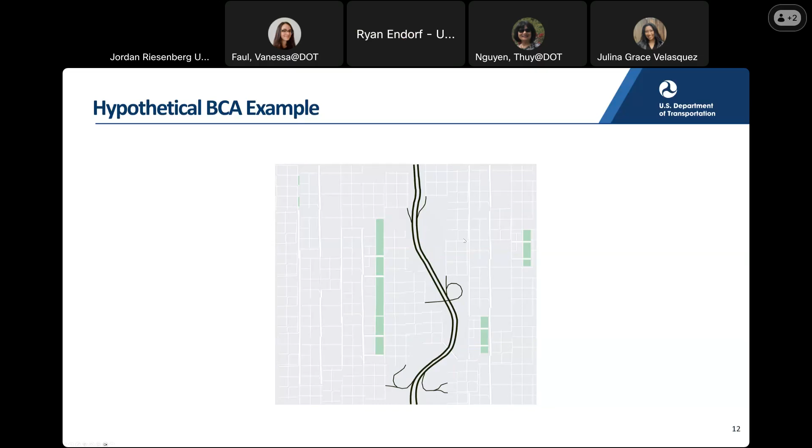So we like to go over just a simple BCA example. If you've never seen a BCA before, we like to walk folks through one from start to finish just to understand the process. So in this hypothetical example, we have a highway corridor that's been built between two neighborhoods. You can see the grid on each side, and our proposed project here will be to add a new bike and pedestrian bridge over the freeway to reconnect the local neighborhoods on each side. And we'll say that our hypothetical project here cost $10 million.

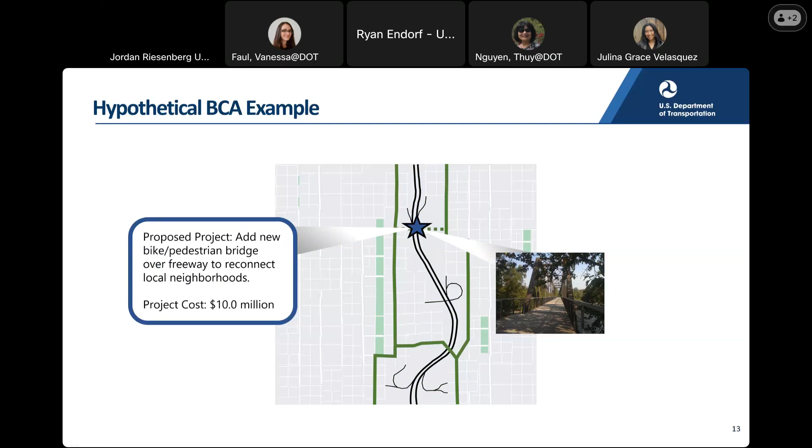So first, we have to define our no-build scenario. Just to illustrate here on the left, we have an existing bike facility on one side of the freeway, an existing bike facility on the other. We have our project location where this green dashed line is. But under the no-build, without this project, the current cyclists and pedestrians would have to continue to use a different route crossing under the freeway. And we'll say that maybe we have some survey data, travel survey data, or trail counters in this case that suggest that about 1,000 cyclists are doing this route daily.

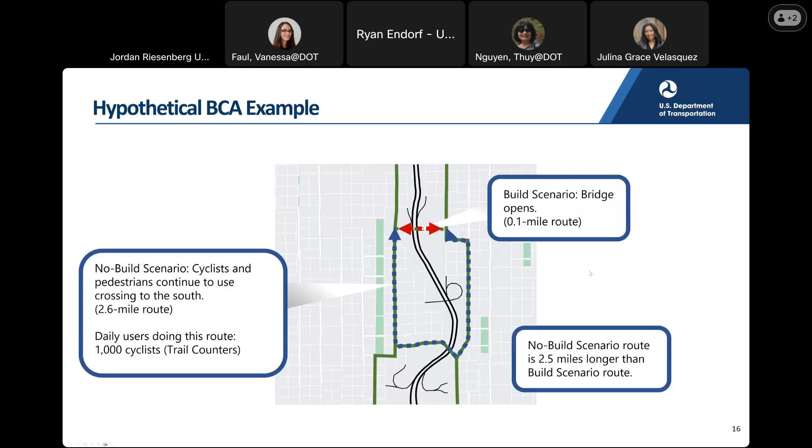Under the build scenario, we'll build this bridge that's only going to be 0.1 miles long. And this will allow our cyclists to have a shorter route, at least for those who would be traveling across the freeway and would otherwise have to travel back north. So our no-build scenario route in this example is 2.5 miles longer than the build scenario route, right? Because under our no-build, our cyclists would have to travel 2.6 miles to detour around this area. And once we open up this new bridge, they'll only have to go 0.1 miles. So they'll save 2.5 miles in travel distance.

So our approach, we want to compare the state of the world with and without the proposed project improvement. Under the no-build scenario, as we said, cyclists would continue to use the 2.6 mile route. Under the build scenario, the bridge opens, it provides this shortcut route that's only 0.1 miles. So we would expect that in this example, the major benefit category would be the travel time savings for mitigating 2.5 miles of additional travel. And these benefits would begin when the project opens. So to show you an example of how you would calculate the travel time savings, just for simplicity to keep this example short, we're going to assume that there's not pedestrians, right?

And if you were doing this project, you would have some assumptions about pedestrians. We're just pretending for a minute that we're just talking about the cyclists. We'll assume an average cycling speed of 9.8 miles an hour, and we'll assume that there's no cycling growth over time to keep the math simple. Again, in the real world, if you were doing this example, you might assume that every year, if the area is growing, maybe there would be more cyclists over time.

So to calculate the annual travel time savings in a given year, this is before we discount them, it would be the marginal detour time times the daily number of users. So how much extra are people having to travel in time? How many people does it affect? We'll need some hourly value of time. So we'll need a way to convert the time to dollars so that it's comparable to costs and other benefits in the BCA. And because we need annual, we need to decide some sort of annualization factor for this, since we're using the daily users.

So secondly, the project information tab. Once you identify the information that you need, you come to this first page and you enter your information. You define your type of project, your location, your length of the project as well, and then you start to put in your highway information, your traffic information, your safety information. That information starts to automatically populate, creating a result that we will see in the other page. Next slide.

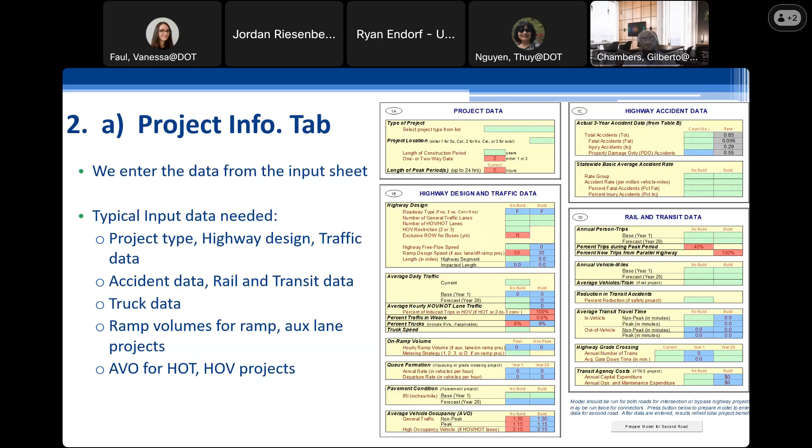Once you have this information identified, you also have to include here your project costs as well, right? You enter the information whether it be for design, right of way, or construction. Generally, those happen before the project starts, and you will always do that.

Later on, you will enter your maintenance costs as well, and maybe you have some mitigation costs that need to be incorporated. So that information is entered in this spreadsheet, and of course, they're all discounted. At the end, we're going to have discounted costs and discounted benefits. That will be the source of our next slides as well.

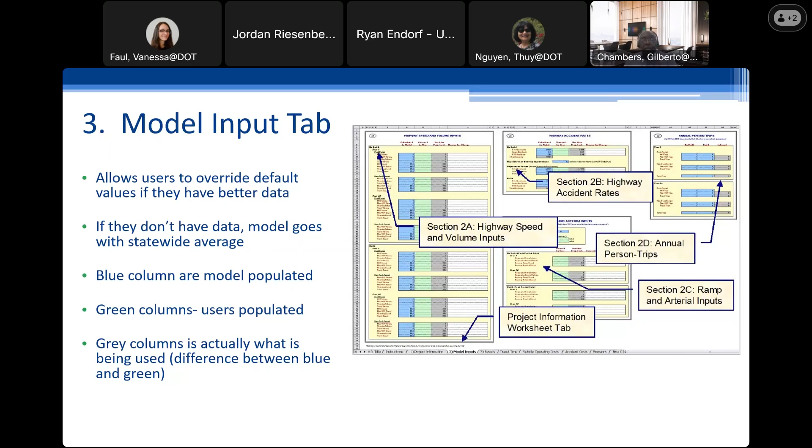So generally CalBC will populate the information for you in the blue boxes. If you have better information, then you can overwrite the information that we present. Our information is based on averages for our state, but if you have information that says otherwise, maybe you have recent research or there's a study that's showing what's going on in your area, you can overwrite that data in the green boxes. Then the final values that will be taken into account for the analysis will be those in the gray boxes. Next slide.

At the end, you will have a final calculation tab, which is going to be a summary of all the different benefits and costs discounted, and that will give you the information you need to proceed to the final calculation. Next.

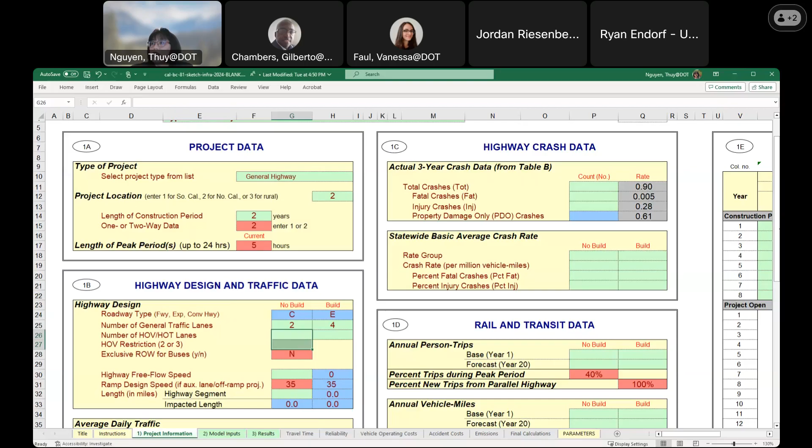So next box is the highway design. So I'm going from a conventional highway with 2 lanes each direction going to an expressway. So I'm going to put in my design, C for conventional, E for expressway. Currently in my no build, I have 2 lanes. And in the build scenario, I will have 4 lanes. And then my project doesn't involve any HOT or HOV, so I will skip that section. Highway free flow speed right now is 55. And by the time I do my improvement, I hope to gain some speed based on the study model. So I'm going to assume 65 miles per hour for that.

The highway segment, this is where you put the length of your project. So my project is 6.1 miles, and it automatically calculates the impacted length at 6.1. If for some project your highway segment is different than your impacted segment, for instance, like the ramps, you're more than welcome to put in the correct length of your impacted segment. You can override this impacted length. Okay. The average daily traffic, this is the traffic data. So some of our CalBC required data, and I recommend users gather all these data ahead of time before you come and use the model.

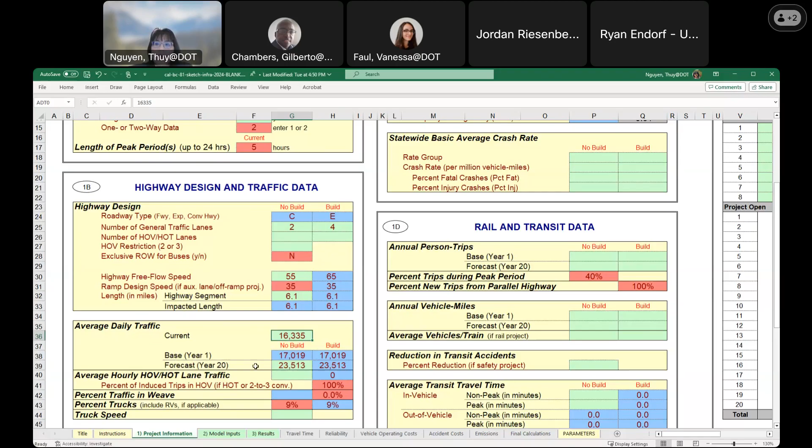So the traffic data, you can typically get it from your traffic ops or the travel demand group, and they can give you your current AADT. So you need the current ADT, and you need the forecasted 20 years AADT. And the base year, the middle line, the model will default and populate that for you. So you only need the current, which is 16,335. And we have that on Caltrans under the census website, and you can download the booklet and pick up the ADT from there. Okay, so you put that in. Again, no HOT or HOV involved, so I will ignore that.

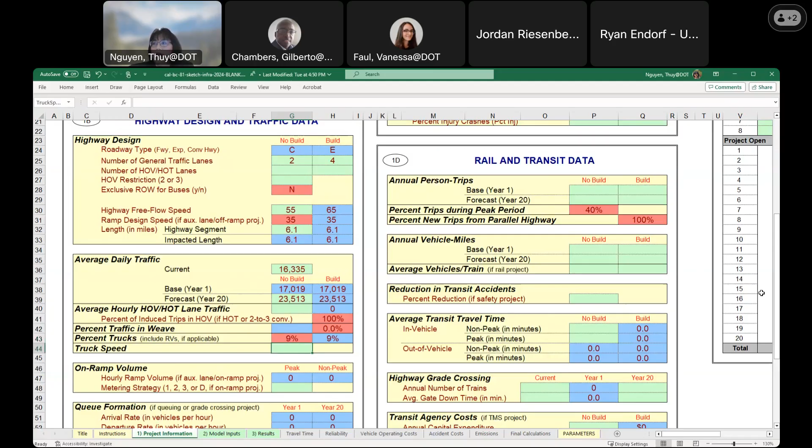No weaving is involved. The model defaults to 9% trucks. In some areas like Northern California District 1, we're hearing that trucks are increasing. It could be 10%, 13%. So if you have different data for trucks, you are more than welcome to override that, but it does default to 9%. The speed, if you have a different speed than 55 miles per hour, you can override that too. So that is for the traffic data box. Down here, I want to call your attention to the information that makes our model a little bit different than the US DOT model.

So this is the INFRA, and every year, as soon as US DOT comes out with the benefit cost guidance for that year, we go in and we take our state Cal-B/C templates and we change them into INFRA, and we take into consideration the AVO, the average vehicle occupancy.

And so the US DOT is somewhat higher than ours. The recommended value is 1.58 for non-peak and 1.48 for peak for US DOT. Ours is 1.32 and 1.15. So California has slightly lower AVO in general.

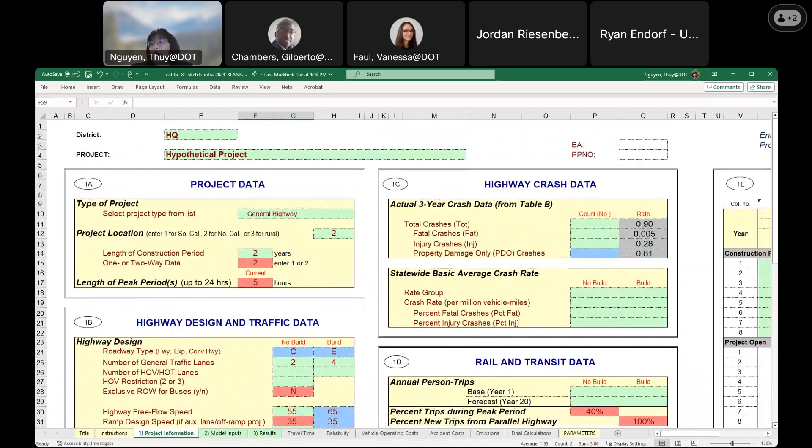Next, highway crash data. So in order to do the analysis for Cal-B/C, you need some accident data, and the actual 3-year data for California, you can obtain it from Caltrans Traffic Ops. So you can input the information there. If you don't have it, you can use the statewide basic.

And we do have a collision on the highway data booklet on the Caltrans website, and you can download that as well. And you can look at your highway rates and the percentage of fatality, and it will also feed into the model, and it would calculate your savings or this benefit for you.

So for the total crashes for this one that I have, based on my data collection, I know that I have 63 total accidents. Fatal crashes, I know I had 6 in the past 3 years, and injury, I have 25. So it automatically puts the remaining from the 63 into the property damage, the PDO blue box for me, so I don't have to do the math on that.

My project doesn't involve any rail or transit data, so I can typically skip the whole box 1D and go over to the cost section. Here is where you put the cost. So your total costs have to do with project support costs, right of way, and construction. And there are specific fields that you can put that in.

Okay, and typically once the facility is constructed, you have to maintain that segment of the highway. So either you have operating and maintenance costs, or you have rehab costs for bridges. So I know that I just have maintenance costs for my segment. I don't have any rehab costs. So it will be 115 for the next 20 years, and you can copy it down. Okay, so that's it. I'm going to zoom out a little bit so you can see everything is pretty much populated on the first tab.

The model input, Gilberto touched on this. So basically, this field here is a user option. For beginning users, we don't recommend you overwrite any data. If you're an advanced user, or you have a better micro simulation, travel demand model, and better counts of your freeway layout and accident data, you're more than welcome to put whatever you want on here, and it will override the model.

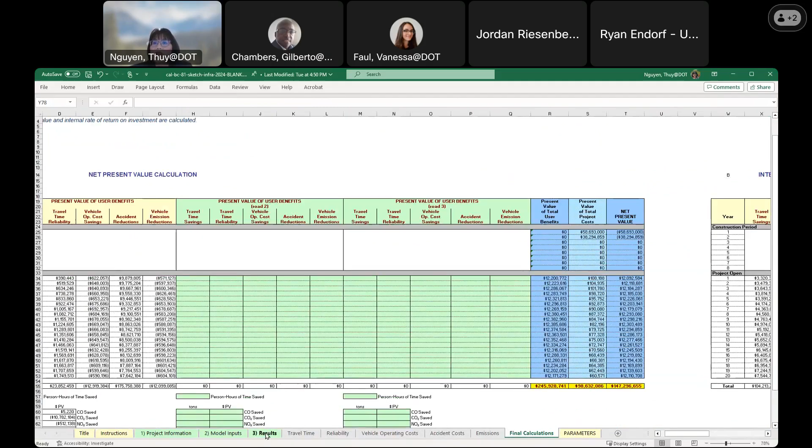Okay, and the way the CalBC works, I want to talk a little more about it, is that once you put in the information on your project information tab, each of the travel time has its own calculation. So you can hover over the formula, and you can see it's very transparent. You can trace out the dependent values and all that. And each of the tabs, reliability, vehicle, did their own calculation, and they put it into the final calculation tab. And from the final calculation, it would feed into the result tab. So that's how everything works.

And then at the end, we have the parameters. And this is where our parameters for INFRA are different than our normal state CalBC template, because we follow the USDOT benefit cost guidance of the year. I think, as Ryan showed, it's December 2023, but sometimes it came out in 2024, January at the earliest, beginning of the year. So we went in and we read the whole booklet, and whatever values we could, we would put in, and then we would change the economic deflator.

The real discount rate is 3.1%. On our state CalBC it is 4.0%. A couple of years ago, USDOT, I think they had 7%.

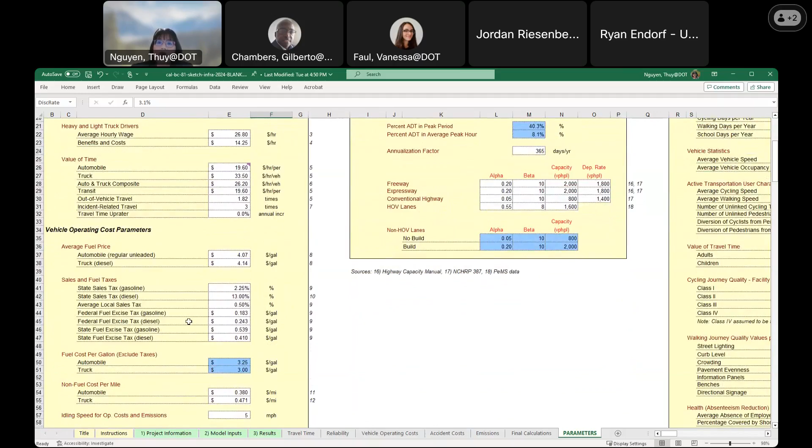So we have to change that to 3.1% on the infra template. Everything else also came from the USDOT guidance. If there's any difference between ours, we would bring up the value to make it more updated. Accident costs, fatality, fuel, gas.

I think the only thing that's a little bit different than ours is the active transportation, because we have our own way of calculating active transportation and the benefit, the mortality, and the rates of cyclists' savings due to health and journey and all that. So our active is a little bit different, but the rest of the module should be pretty much similar to USDOT benefit cost guidance. And if you scroll over to the right, it has all these values.

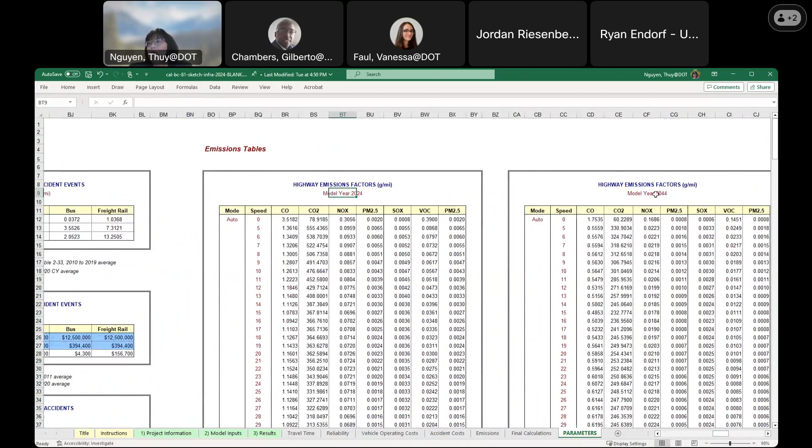And the EMFAC table we have, as soon as California Air Resources Board has some new model built in with the zero emission vehicle, we apply that to our year. So now it's 2024 model year, and the future is 2044. And as you can see, in the old model, they didn't have a whole lot of saving. They were at this benefit because there were a lot of combustion engine cars still on the road.

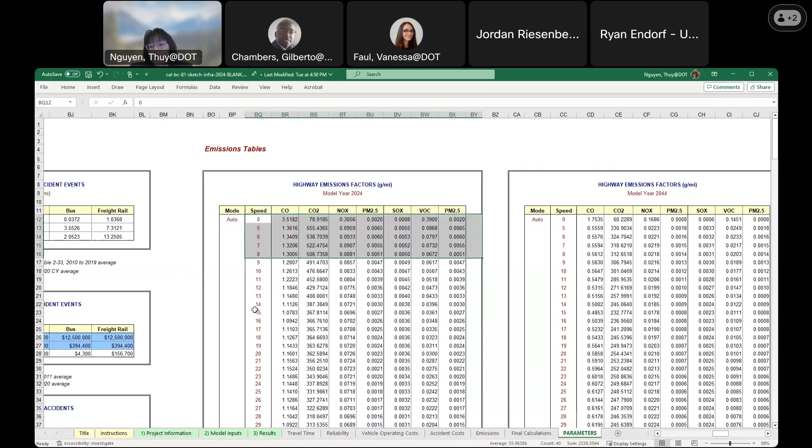So if the car is standing still idling or at below 10, 15 miles, the emission would be bad. And then as the car speeds up between 65 miles and above, they would lose some emission. So with the new model now, a lot of zero emission, the ZEV cars are coming into play.

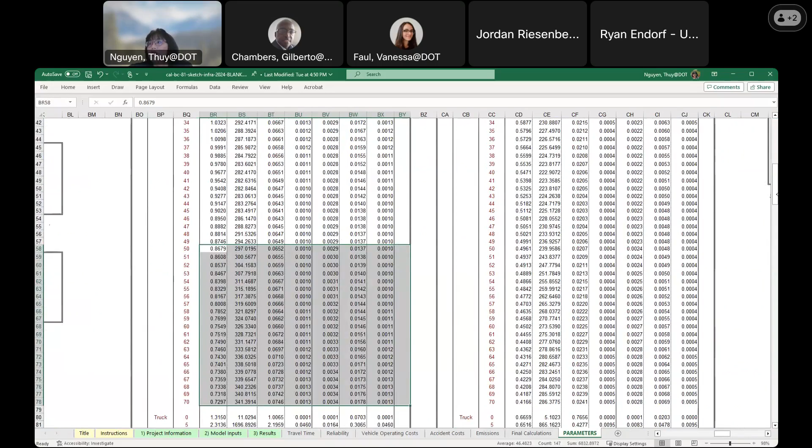So by 2044, SB 743, most of these would be like, it doesn't make any difference. You're not gaining a whole lot anymore out of the EMFAC model, because everything would be leaning toward the ZEV cars. So if you look at the difference between this model and the 7.1 version of the Cal-B/C, there's significant difference in the EMFAC. And that's it. That's all I have for my Cal-B/C.

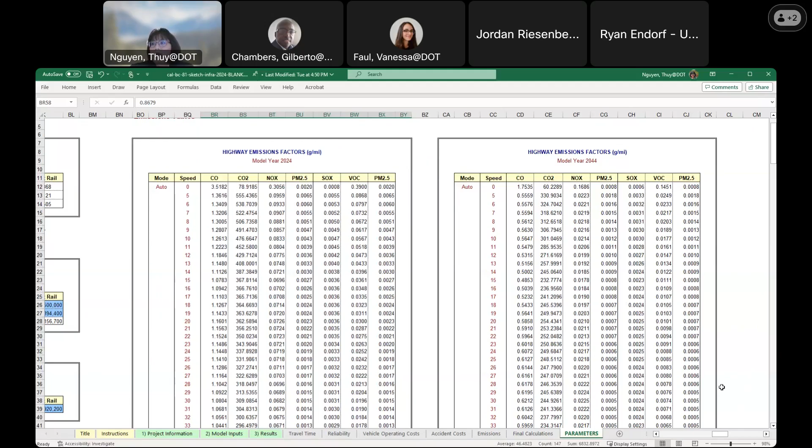And we have a whole suite online. We have training booklets. We have training videos on our website. And our Cal-B/C has a lot of information. It can be time consuming, but I believe that if anybody puts time in and tries to learn the Cal-B/C, everybody can conduct a benefit cost analysis. Okay, thank you for your time.